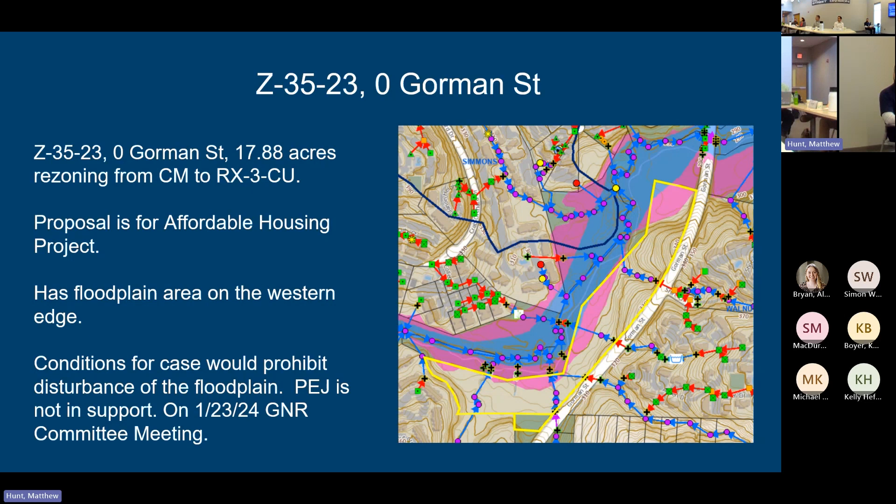All right, next slide. So our next case is like half a mile away down Walnut Creek at Trailwood Drive and a little south of the intersection of Trailwood and David Fairner. Next slide. And it is two properties on Trailwood. One is almost completely in the FEMA floodplain, as you can see. And then the second smaller parcel is highlighted in yellow there. And that's out of the floodplain.

And currently there is a planned development district on this property that was from the mid-2000s, I believe, for essentially putting 12 single family lots on this property. And the applicant owner would like to change that to an R6 zoning. And they would essentially like to mass their density on that non-floodplain area there on the high side, for lack of a better term. There is a condition now to completely preserve 6 acres of the floodplain that's on site, but there's about 7 acres of floodplain there.

They want some wiggle room for like greenway connections and any ground level parking, which is currently allowed under city code as long as you don't change the topography in there. They can use it for parking? You can pave the floodplain? Correct. I mean, you would have to do some more water quality regulations, but as long as you don't change the topography of the floodplain, you can use it for parking. Is the 0.2% the 500 year? Or is that all? Yeah. Okay.

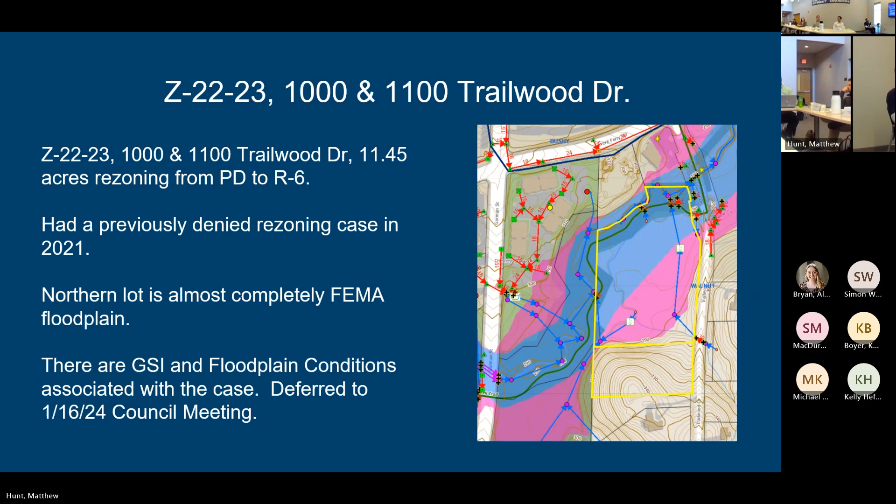next. And the next one is off on the other side of town, in the northwest section of town, on Strickland Road in the Falls Lake watershed, Z4023. Go ahead, next slide. This is a case where they are rezoning 16 acres from R4 to R10. The odd part is that they just rezoned from R1 to R4 back in 2021, and now they're going to come back in to go to R10.

And this would potentially allow for more density and apartments in Falls Lake watershed, which per council policy right now is not allowed, and that's based on a Raleigh Water concern about Falls Lake as well. So they have concerns about this. This is going to the December 12th planning commission meeting. So it's not even to the public hearing process. It's still the planning commission.

And just for everybody's knowledge, the planning commission will talk about it at the 12/12 meeting, which is next Tuesday, and they will either send it to council with the recommendations for public hearing, or they'll hold it till January, because like the city council, the planning commission does not have a second meeting in December this month for the holiday break. So that's kind of where that is, and Raleigh Water and Raleigh Stormwater as well will be attending the planning commission meeting on Tuesday to weigh in on this project.

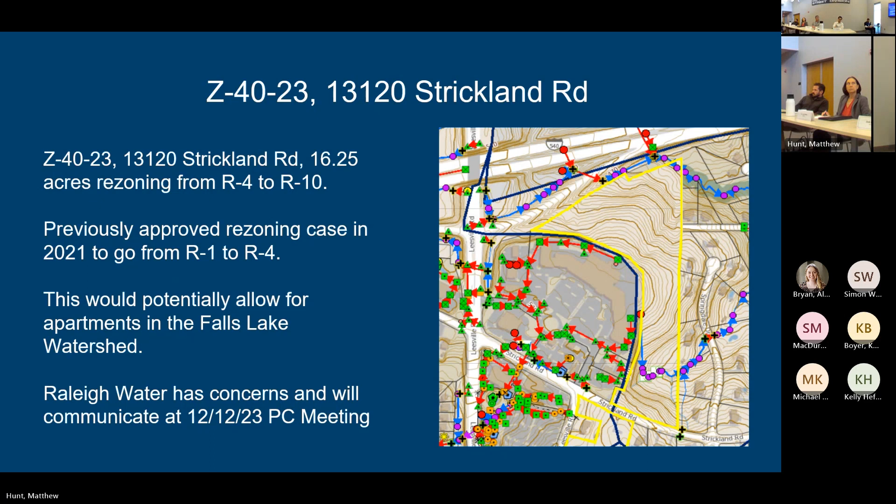All right, that's all I have for that. Stormwater staffing updates: two new employees here.

The first one that I know for sure is here is our new senior water quality specialist, Kim Galusha. Kim comes to us from Raleigh Water and brings a lot of experience in environmental monitoring. She has an associate's degree from NC State and 14 years of work experience, including with the city of Raleigh, ground and greenway system maintenance, land application permit compliance at the Neuse River Resource Recovery Facility, and several years of sampling and technical data management experience for both groundwater and surface water monitoring activities. Kim will be a technical lead within the illicit discharge and water quality monitoring programs, as well as helping us make updates to meet the new permit requirements for the MS4. Welcome, Kim, on board.

And then there's Eric Meyer. Mayor, sorry, I was worried about Kim's last name and didn't even think about it. Sorry.

Eric Meyer has enjoyed a very professional career within the civil engineering space. Prior to joining the city of Raleigh engineering services stormwater division as a CIP project manager, his experience was initially based in the field of geotechnical engineering, primarily in the New York City and Las Vegas markets. Since coming to Raleigh in 2011, his expertise developed with performance and project management of special inspection and construction materials testing activities, consisting of permitting, subsurface investigations, observing foundation installation, inspections and testing of backfilling, reinforced concrete, masonry, mortar, and grout, as well as observation of structural steel, structural wood, and cold form steel framing. In 2023, Eric represented the Structural Engineering Association of North Carolina at the National Council of Structural Engineer Associations annual conference in Anaheim, California. He will be serving as their president in 2024. Eric earned his bachelor's of science degree in civil engineering from Rensselaer Polytechnic Institute.

Thank you. So I'm here this afternoon to give you an update on the city's stormwater design manual. As was noted earlier, we have several folks in attendance today who wish to comment on this. I understand you also received at least 2 emails about this topic, and I will be addressing some of those points in today's presentation.

So this is a brief agenda today. I'm going to talk about the status, give you a big overview of the comments, talk about changes we've made based on those comments, and then go over some of the comments that we've received and acknowledged but have not made changes in response to. Then I'm going to talk about the proposed UDO text changes, which complement the manual, and then we'll talk about schedule.

So at the beginning of September of this year, a draft version 3 was made public on the website, and we solicited comments for a month. We have been working on that draft. We have done a red line version of that, which we will provide you after this meeting, and that was sent out to everyone who commented on version 3. So the red lining just shows the changes that have been made since version 3.

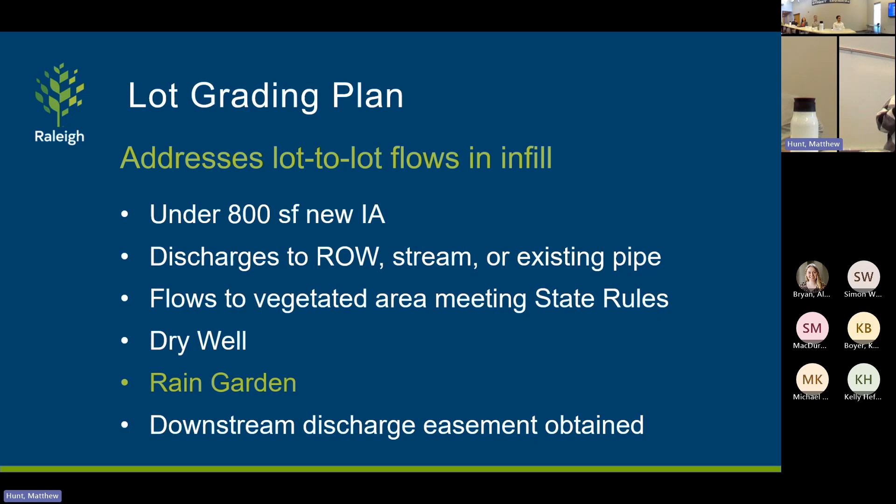All right, I'm moving on to chapter 4, which is the conveyance design chapter.

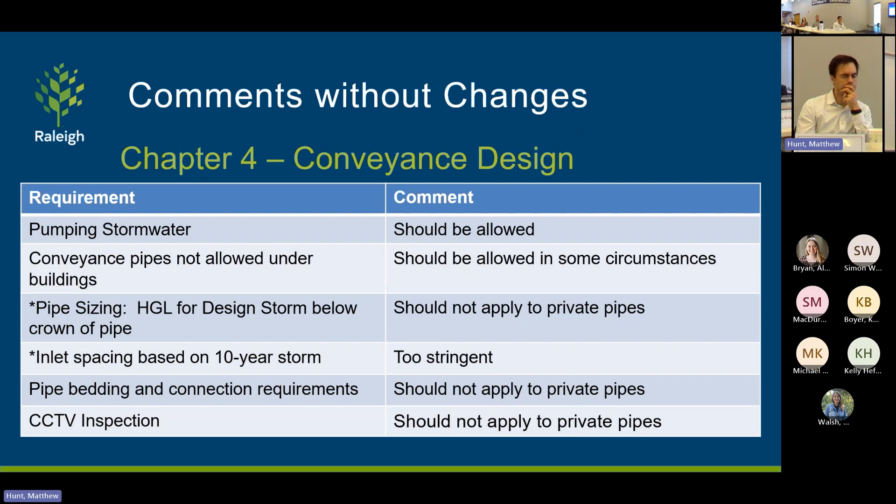Personally, I'm a little worried that if we start publicly sharing documented flooding locations, people will stop coming to us with flooding concerns, and I would hate to see that happen. They don't want us to put that out on our website, but that's kind of where that's going. We do want designers to know that if they contact us, we're happy to share information about where a concern is, based on something like a cross street, in advance of them completing the design.

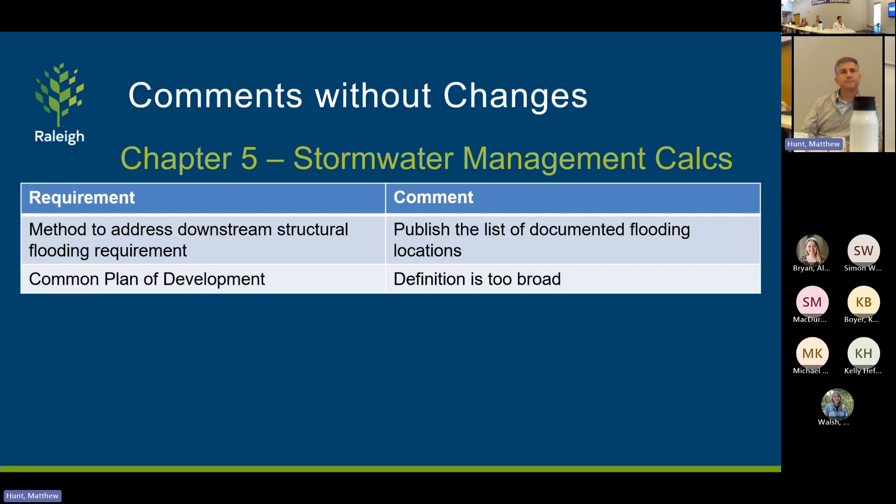Some other comments that we got in the SCM design chapter, we got comments about pumping stormwater. We allow that for rainwater harvesting systems, but not for other SCMs.

We did not previously have very specific requirements about freeboard, the amount of space between the water and the top of an embankment. We have added those specific requirements, and we got some concerns that it would increase size or cost. We are clarifying to folks that we are defining embankment based on the Natural Resources Conservation Service definition, which is 3 feet of water against a fill slope. So this wouldn't affect things like most bioretention or other smaller practices.

We also have included more stringent requirements for SCMs under buildings, which I mentioned before, and for retaining walls used in stormwater control measures. Those are both currently things we allow, and we are going to continue to allow them, but we are asking for a signed and sealed letter from the structural engineer who is designing the retaining wall or the building. The reason we're requiring that is that typically we receive a report signed by the landscape architect or the civil engineer, who is typically not the design professional involved in the retaining wall or building design. We want to make sure they're aware of the saturated conditions that might be caused by those.

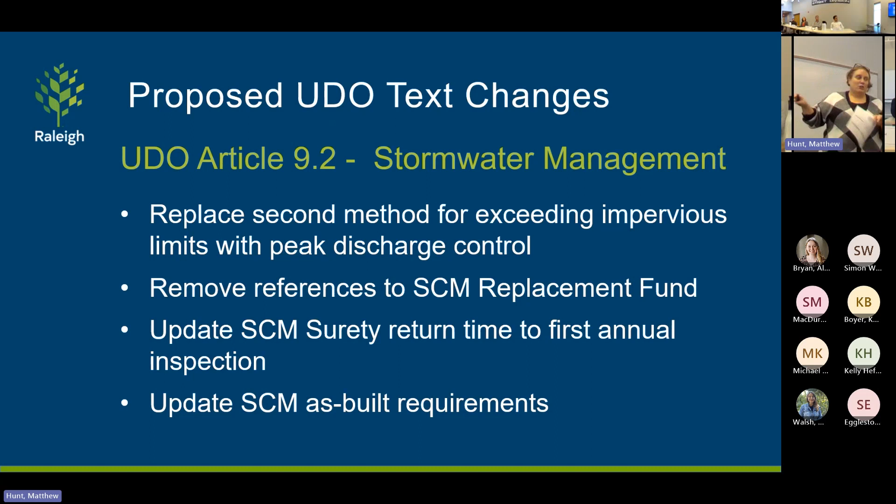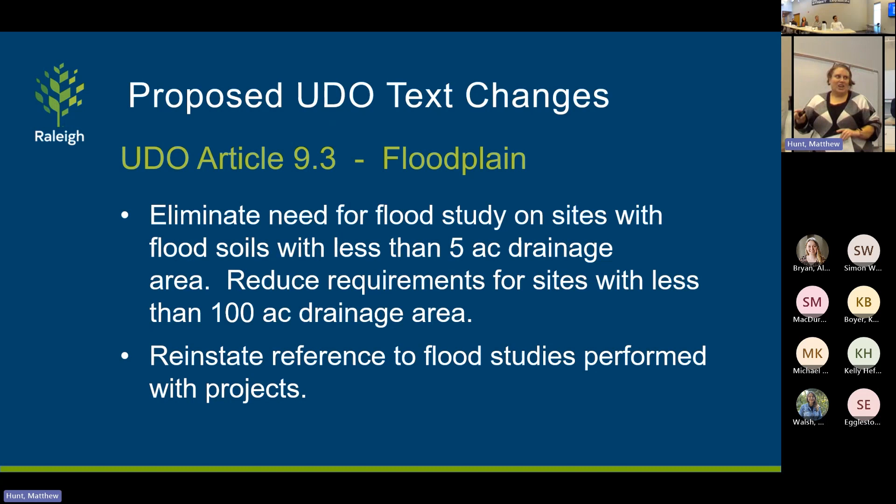We also are making some changes to the SCM as-built requirements. Those are in the design manual that went out for review, and we'll just be making the UDO match that. These two items are also in the design manual, and we're making the UDO match that. We'll also be updating the ESC surety amount.

If you have questions about that, I'm going to ask Lauren to help.

The design manual will replace both the current design manual and GILDA, the guidelines for land disturbing activity. There are some requirements currently in GILDA that we're going to move to the UDO.

This is probably one of the more substantive UDO, direct-to-UDO text changes. It's the difference between built area and built upon area, which is very confusing to the public, to designers, and sometimes to the reviewers.

Right now, both terms are used in the UDO, and they mean different things. Built upon area is used in most of the regulations that apply throughout the city. Built area is only used in the watershed overlays. Built upon area basically means impervious area, while built area means impervious area plus permeable pavement and green roofs, and other things that could be partially impervious.

My understanding is that the history of this is that it was intended to further limit the amount of development that could occur in the watershed overlays. We do see folks wanting to use permeable pavement, particularly in the watershed overlay districts.

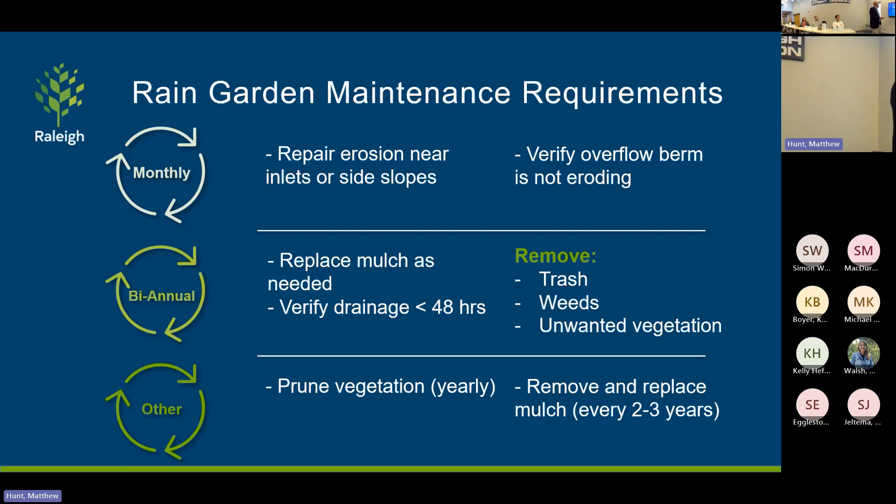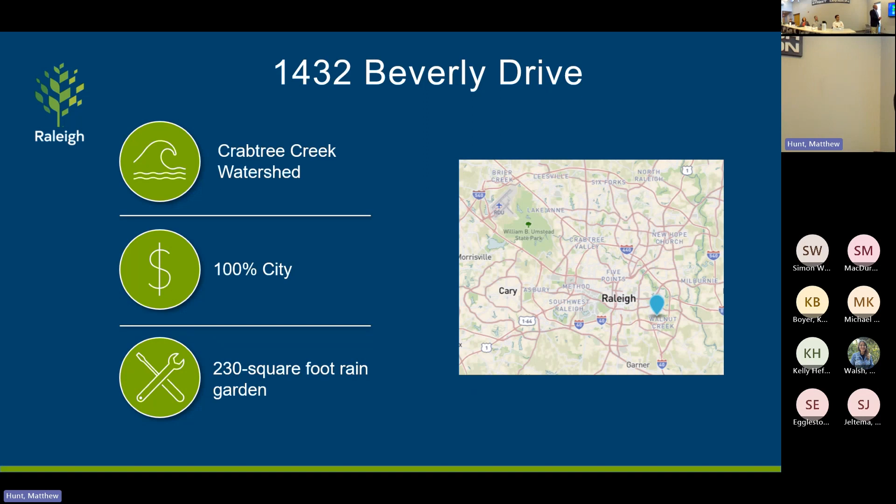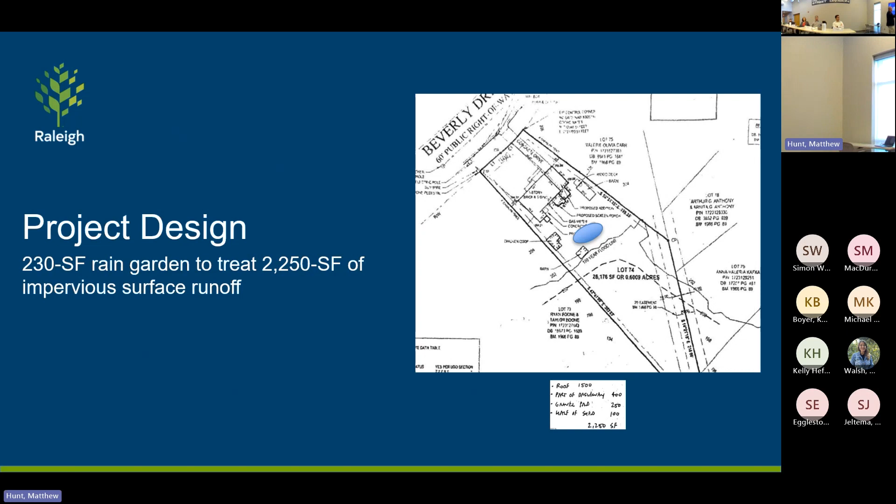So we'll jump right into the first project. This is Beverly Drive, Crabtree Creek Watershed. This is a 100% eligible property, pretty standard 230 square foot rain garden, capturing all the runoff off of their house and part of the driveway, located in the backyard, outside of the 100-year floodplain and outside of a sanitary sewer easement that's in the back. You can see that they've recently done work on that sanitary sewer easement. The rain garden is not going to be in that area. You can see some of the drainage area up in this home.

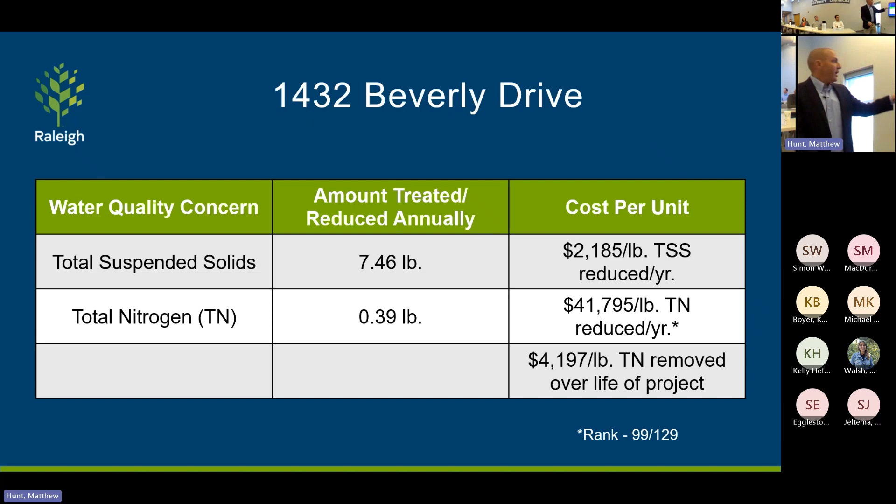Total cost, $16,000. Cost breakdown. I'm going to run through these; if you need me to slow down, please let me know, and I can go back and elaborate. You can see how this ranks against all previously approved rain gardens. You can see the metric once again. The limit set by the commission in February of '21 was $7,000 per pound of nitrogen, as a point of reference as we move through these. So I want to ask, as I typically ask, would you like to review and vote on these separately or collectively? Let's just vote on each one.

Any questions? Just curious, it's 100%. Is this our first 100%? Second; the commission saw the first today. Curious. You're talking about communication or something. And I have more on that. Okay. Grant, if no questions, motion to approve.

Second. Barrett, all in favor? No opposition. Okay, let's go. Great. We'll move on to our second 100% project. This is 2421 Bertie Drive.

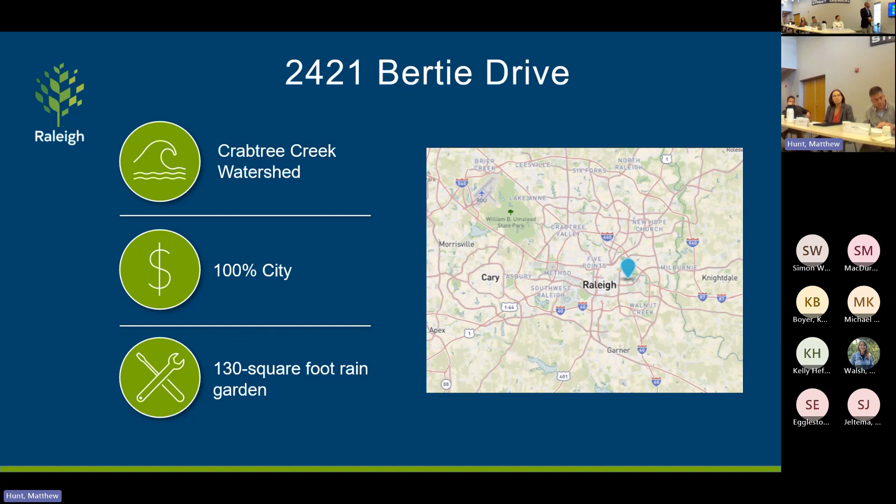So the rain garden, about half the size, going to treat roof runoff and a little bit of driveway. It's going to be in the front yard in this case. You'll notice that there is a private pipe that runs from the backyard and goes out to the street. There is no private or public easement here. The final product will lie on either side of that. They're not sure where it'll land, but it'll be outside of the footprint of that private pipe.

And the pictures might tell a better story. They have a lot of room in this front yard area. The pipe is closer to that white fence, so most likely it'll be located out of that footprint. There's no other utilities that would impede that. Price lower than the last project, fairly typical. It does require an under drain and they do have enough drop for that to function properly. You'll notice, once again, the rank and it being under the nitrogen metric.

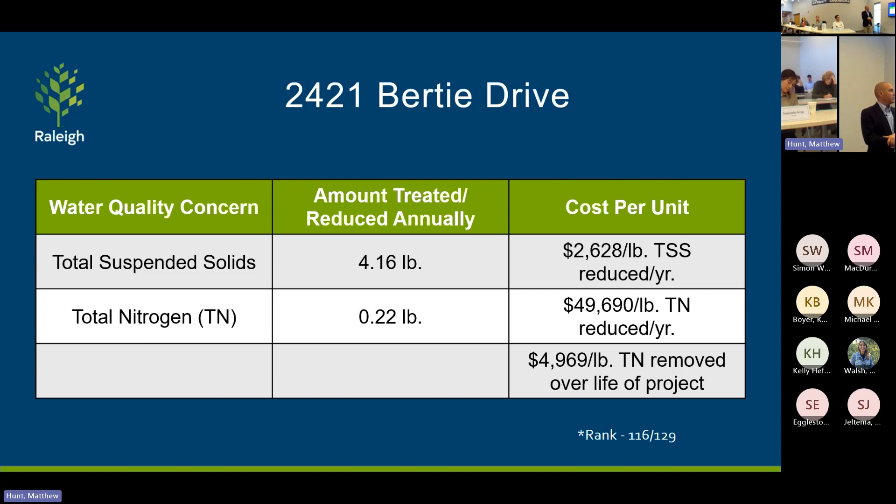Any questions for Bertie Drive? Yes, sir. You just talk about what's smaller, even though they're small. Sure, it goes back to how much impervious surface they're treating. So quick rule of thumb, we tell folks, and this is assuming 10 inches of ponding in their rain garden, we tell folks to account for 10% of the footprint that's flowing to it. So if they have 1,000 square feet coming to it, they're gonna have a 100 square foot rain garden, assuming that 10 inches of ponding on the surface.

That is a conservative estimate where if you were to pick up that 1 inch of rain off the roof and put it in that rain garden, it would be able to handle that volume. Obviously, that's conservative, so these overperform, and that is only mutually beneficial for the property owner and the city. There wouldn't be much benefit later. Not from a water quality standpoint. Kind of the rule of thumb is that most of the pollutants are in that first 1 inch of rain, so capturing 2 inches of rain from a pollutant removal standpoint is not cost effective.

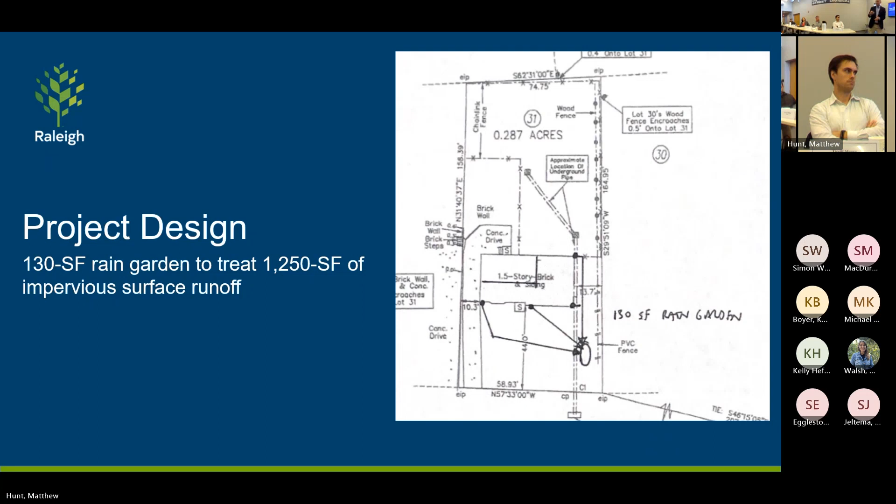Any other question? Motion to approve. Luann, second. All in favor? All right, thank you. On to number 3, Glenridge Drive. This was actually submitted back in the summer, and we have been bringing as many as feasible to the commission for review. So this one has been in the queue for a little while.

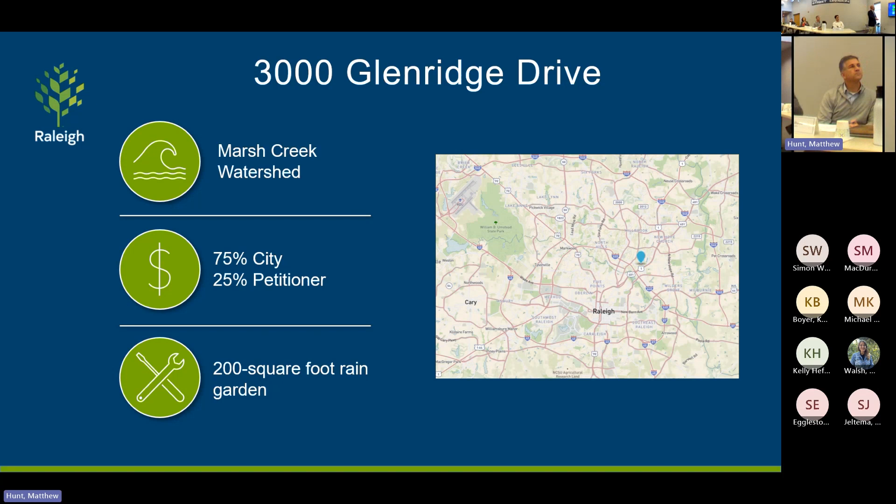Similar to the ones we just reviewed, eligible for 75% reimbursement. That factor of 10 rule of thumb, and I might add that has been well received by both designers and applicants. It's easy for them to wrap their head around. I'm thankful that it's not like pi or something, explaining that concept. But yeah, so it captures roof runoff, a little bit of driveway.

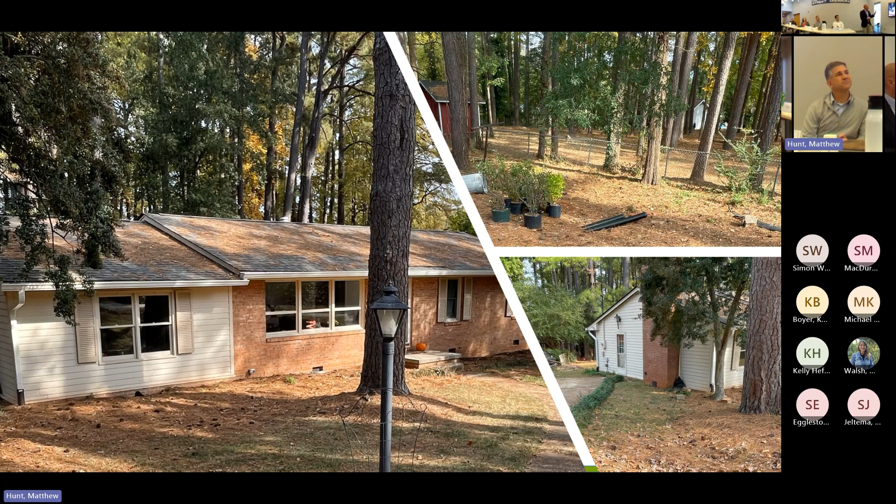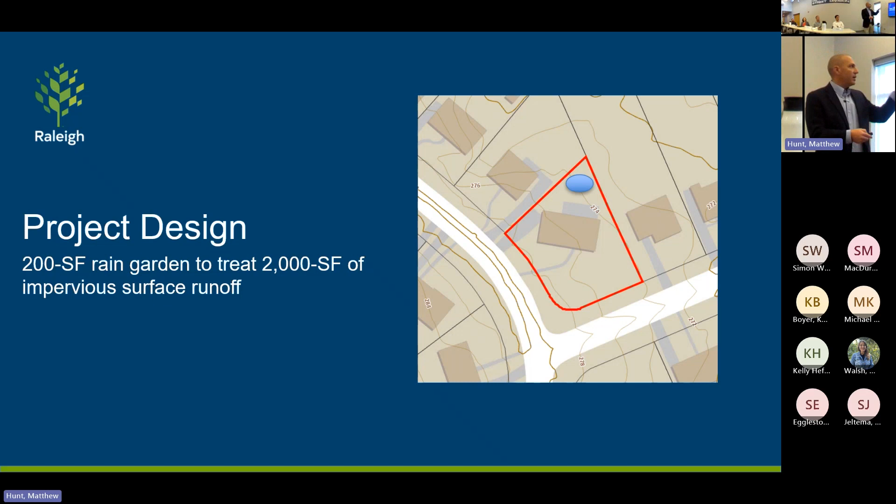One thing that's special about this project is the runoff as it stands just pours into the neighbor's yard. So this will alleviate some nuisance flooding on a downstream neighbor, and also add an aesthetic function and amenity in this backyard. Price splits the difference right there between the first two we looked at, so not too far out of line. And you'll see the metrics also floating around the 4,000 pound of nitrogen over life of the project. Any questions with 3000 Glenridge Drive?

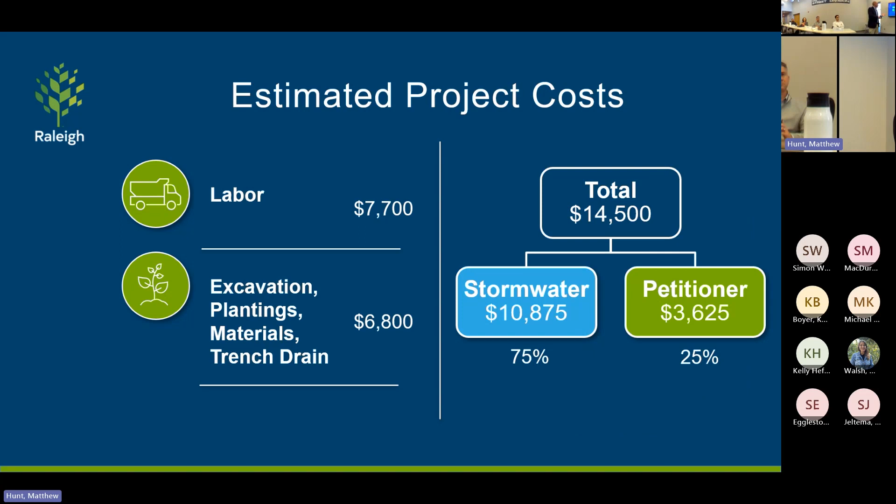But they can oversize as long as it's still cost effective. They could put in a larger one that is cost effective. What you run into is that cost metric. If it's going to cost twice this cost to install a rain garden twice that size, your metric is going to be potentially twice this metric, and you're not going to get much.

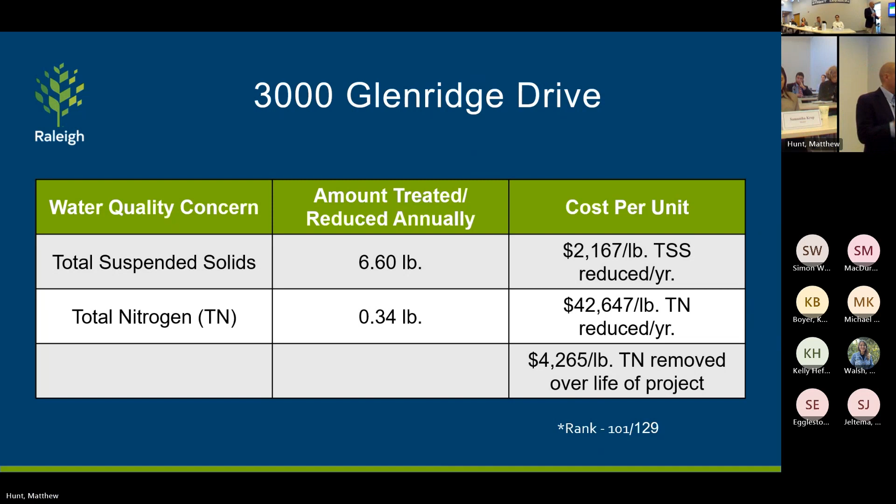It's probably going to be higher because you're not going to get as much credit for removal. So that metric is great to be able to lean on if needed. And we aren't going to push back if they come back and say 300 square foot rain garden. That's fine. We're going to look at the metric and then present that to y'all. So it's not that it's not allowed. There's just considerations if you're going to go bigger, more expensive, and maybe that answered your question or comment.

Motion to approve. Yeah. All in favor? Good. All right, next project. Prescott Place. Another one of these that probably could have come in July, but we just had so many projects in a day. So one of the last of the summer rain gardens.

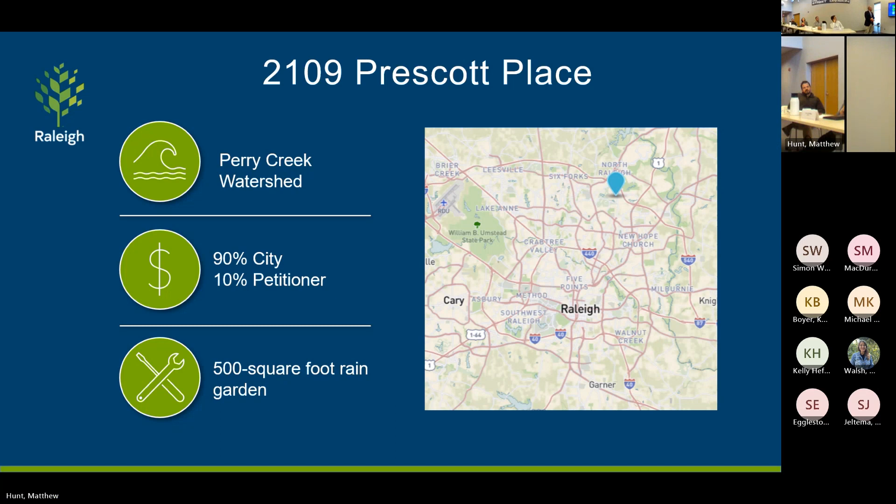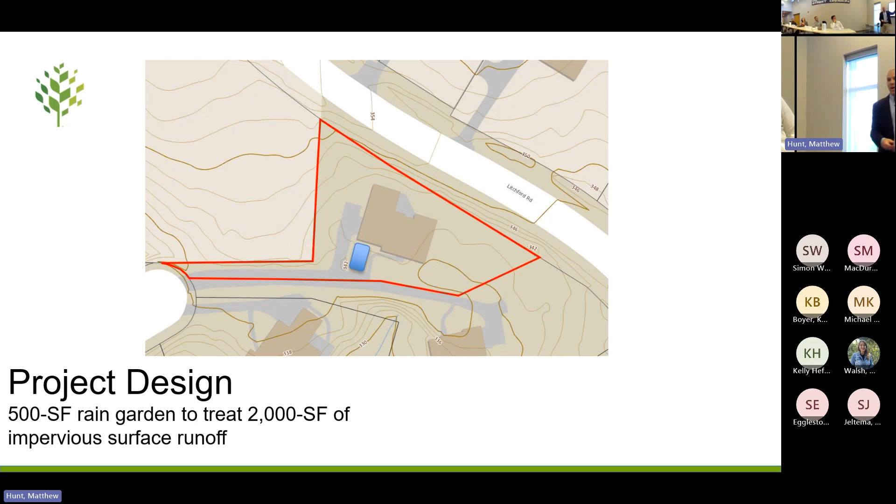Yeah, this is an example, very large rain garden, 500 square feet. Notice their treatment area, 2,000 square feet. So this was the example in my mind. Looking at this, it's kind of a unique configuration. They have a relatively flat area in the front of their yard between a driveway, a walking area, and an alley. They own the impervious surface that drains to it, and it's just unused space.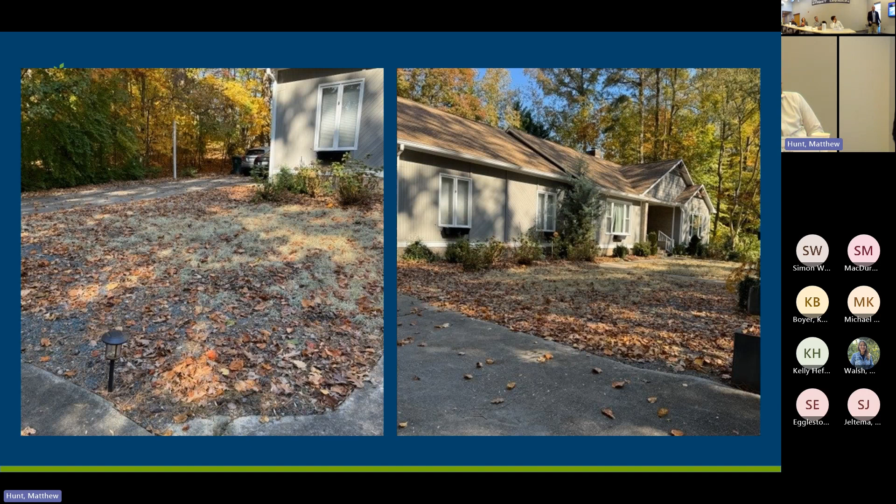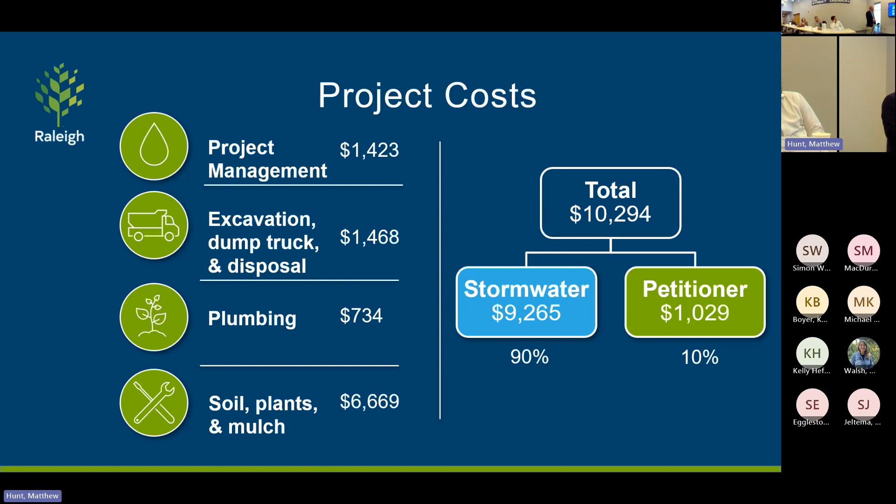It's got good infiltration, so they're gonna direct some downspouts to it. They're gonna capture the surrounding impervious. And this is gonna serve both a water quality benefit and an aesthetic amenity in that space at the front of the property. So you notice pretty good price for the size. Good breakdown there, and you'll notice the metric reflects that price point in the amount of impervious being treated.

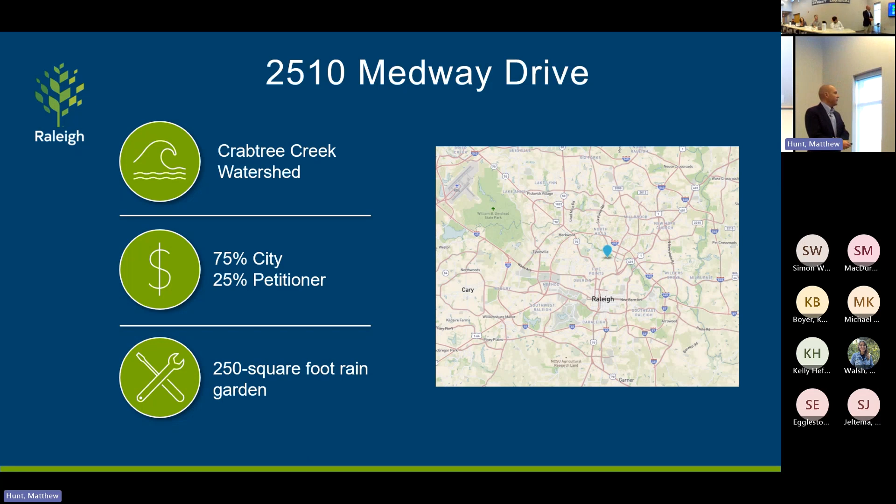So I know I'm racing through these, but in the interest of time, any questions for Prescott Place? Motion to approve. Carol, Wayne, second, all in favor? All right, and final one today is Medway Drive. Crabtree Watershed, 250 square feet. Everything's pointing to the back left corner of the house, capturing roof runoff. You'll see the area back here in the backyard. That's for the future footprint.

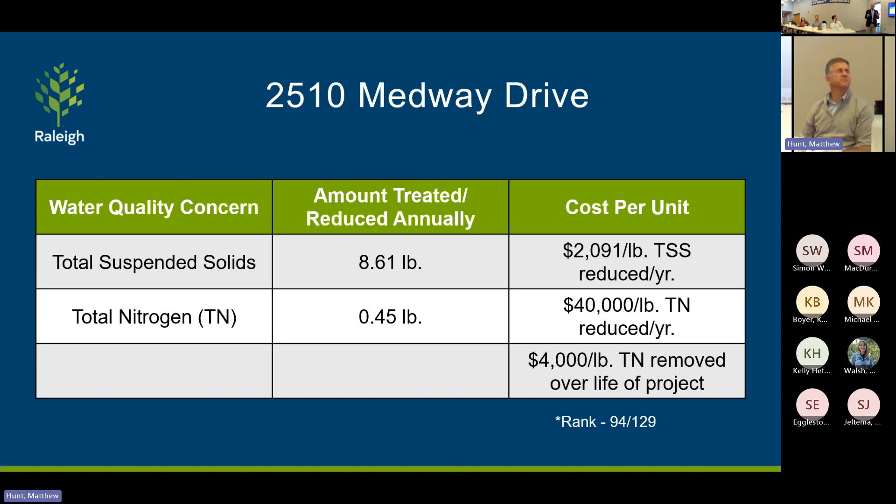About as straightforward as they come. You have slope that goes there anyways. Water can easily be directed to the rain garden. Breakdown in cost. And then your metric, you'll see how that compares to the other four. Nothing really remarkable to point out across these five that I wanted to show y'all. Any questions on Medway? Is there a simple way to explain why this one only qualifies for 75% in the Crabtree Creek watershed as opposed to the others that are 90%?

Absolutely. Policy does that. So the policy identifies five high priority areas. And those are eligible for 90%. The rest of the city is 75%. So those five high priority areas are your two TMDL watersheds, which have been identified by the state as being impaired watersheds. So there's two. We have two water supply watersheds, Falls Lake and Swift Creek. And so those future drinking water sources, they're priority.

So that's four. And then when this concept was developed, they looked at a planning overlay that captured the downtown district that was almost 100% impervious, where everything's built out. We're not gonna be able to treat runoff with UDO or through redevelopment because it's 100% impervious. We wanted to target that. So downtown, the two watershed overlays and the two TMDLs. So that's the 90% compared to the 75.

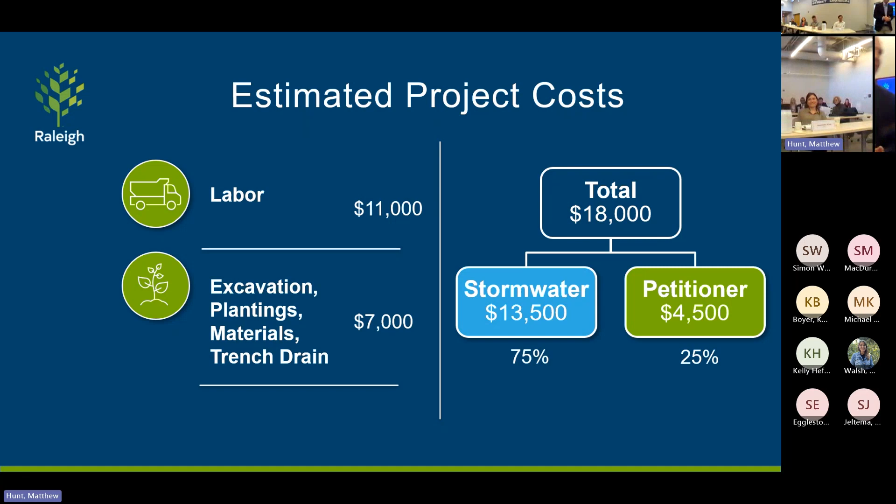And then the 100%. 100% is based on several criteria, census data, and I'm more than happy to elaborate on that. If located geographically within those areas, there's an income threshold, a rent threshold, and/or a nonprofit entity can apply for the 100%. I remember having this conversation. I know it's redundant, but I appreciate the clarification. Anytime you got questions, we can go into a lot more detail if needed. Thanks. Happy to answer. Anything else?

Motion to approve. John, second. Matt, all in favor? Very good. Thank you so much. Thank you all for your support. It looks like we're at 66,000 till end of June. Yes, sir, Fred. And we've approved how many in the standard? We are at 17 projects for the year. Y'all just approved these, so we're up to 22 projects.

Two of them are 100%. One is from the previous fiscal year, if I'm not mistaken. So I have to look back. 2 or 3 are the 100%. That feels pretty rapid. Is that ahead of schedule? Absolutely. Ahead of schedule both in project number and in expenditure of our dedicated fund. Make sure Justin highlighted that. That's a lot. So thank you all.

Justin's hair's on fire. That's our big burn off. All right, thank you, Justin.

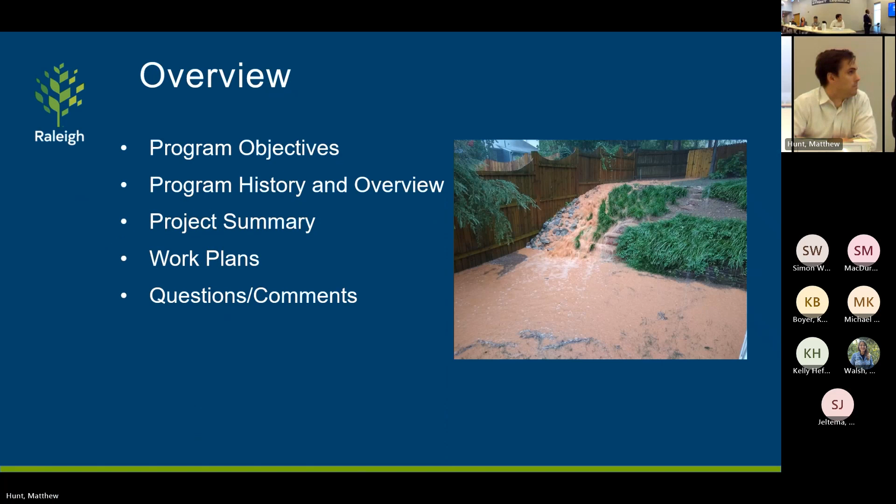So here's the overview of the presentation. I have to read this—it's the ritual we do every time.

The mission of the Stormwater Division is to preserve and protect life, support healthy natural resources, and complement sustainable growth within the Raleigh community. The objective of the DA program is to assist in reducing flood hazards from urban stormwater runoff, and to help protect and improve water quality in local streams and other surface waters.

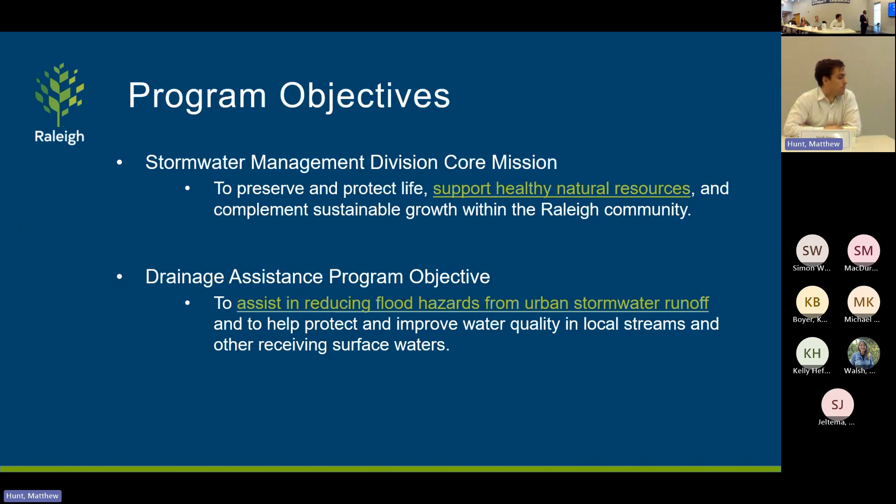The city has been growing rapidly over the last 20 years. A lot of growth, and our infrastructure has been getting older—the pipes, the streams, their courses have changed, erosion has increased, and the need for resources has increased.

So when we eliminated the cost share program and made it fully 100% city funded, that was the need of the hour—to address equity issues across the city and to efficiently deliver the product. That's the quick overview of the project so far.

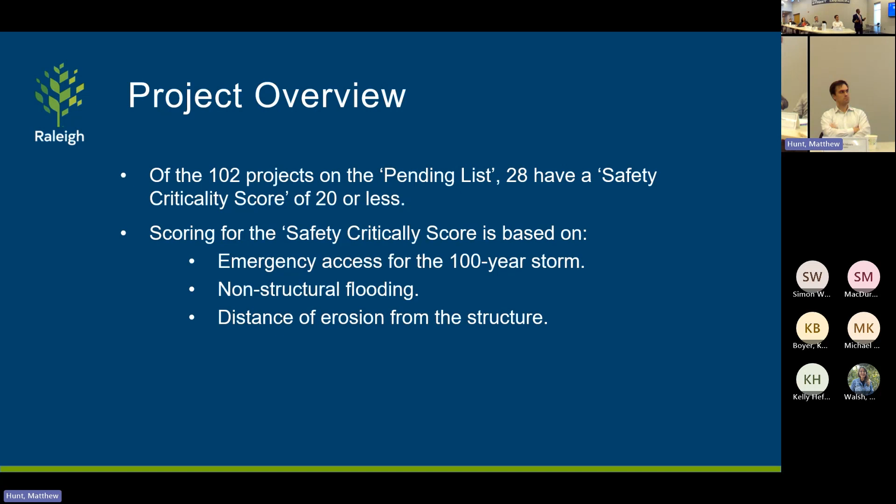So again, it's a multi-pronged approach that we are trying to adopt to expedite the delivery and do more number of projects - all the pending list and the projects coming up each year. Staffing has been an issue, and we are trying to be mindful to have the right balance, the optimum number of staff - not to hire too many or too few, but the right balance. It's hard to say what's the right balance because the projects fluctuate, but I think we need some more staff, and that's what we are trying to hire.

So Chad has been working very hard, like since last 6 months. We were not very successful in getting a senior engineer on board, but this time we tried even harder to attract more applicants from across the country. So the selecting interview is end of this month, right before Christmas - say 2 weeks. We're very hopeful that we got a good pool of candidates.

So we should be able to recruit an engineer who can do in-house design, and then we can have the construction project. We already recruited - you met Eric, right? So Eric is here, and then one more engineer we are trying to recruit. So we will have 3 new staff. That will definitely increase our capacity to take on more projects.

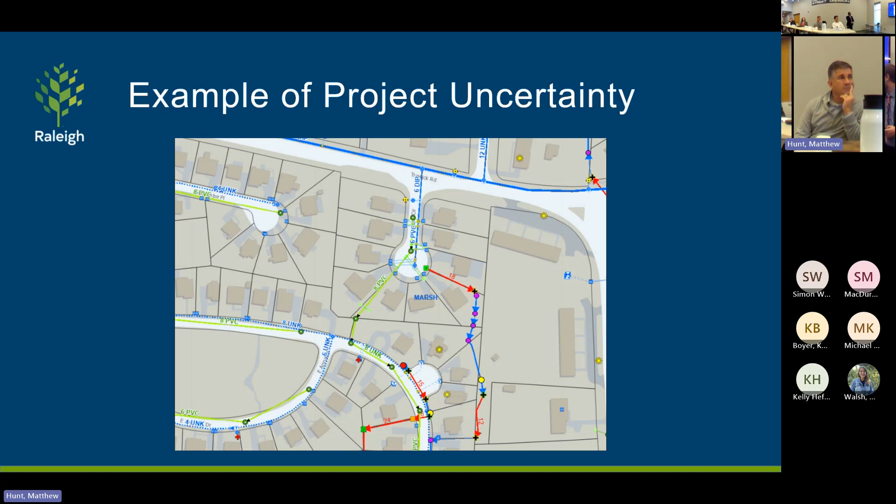So we had to go back to the drawing board, and we met with the residents again, even after several community meetings with these residents in this neighborhood as well, to see how they were impacted.

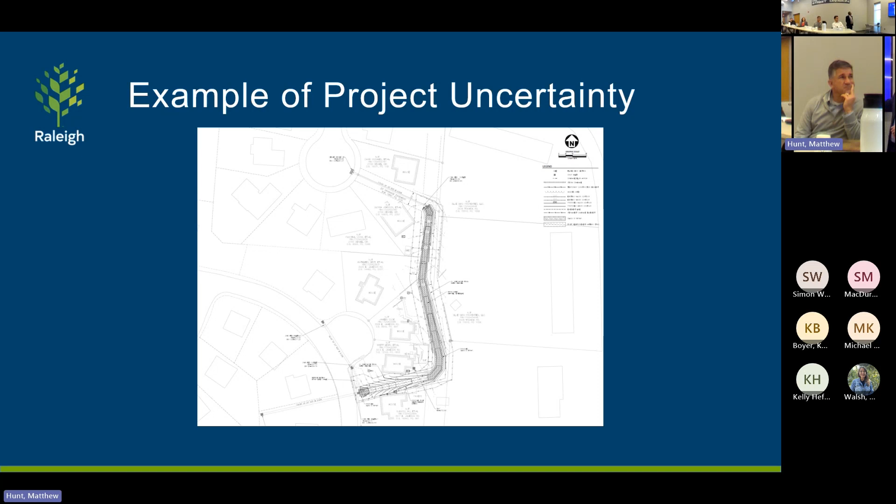Here's a design plan that shows the initial design going around to the property that was a non-benefiter, and then we have the design to try and keep it on properties that are impacted. Why this solution wasn't thought of first was because of the impacts we see with the trees on the neighborhood and the driveway, which they were concerned about. But we did make a good faith effort to try and get that non-benefiter to participate. At the end of the day, if they're not willing to participate, we have to move on and find another solution.

But these are some examples of delays that can occur that, in my opinion, are beyond our control.

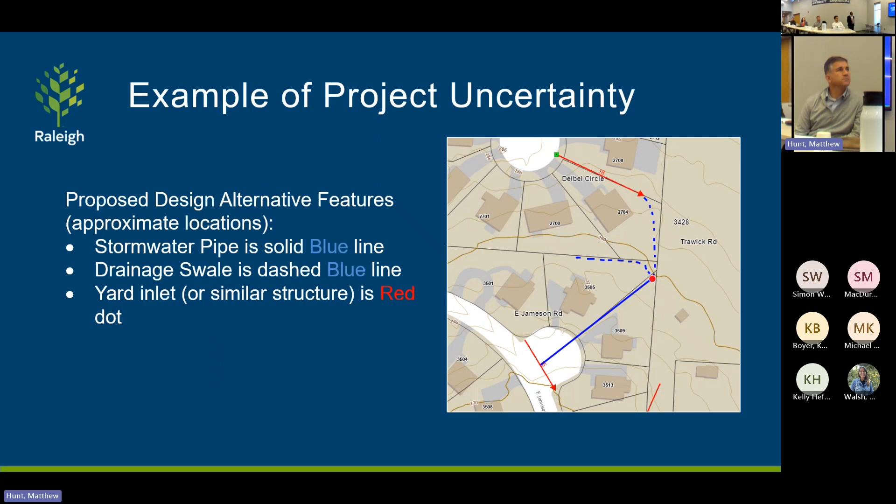We work with our partners. We are working with Raleigh Water and Parks, Resources, Culture, and Recreation to try and work on some projects. I'll get into that as well here.

Also, Transportation Field Services, they do a great job. I'm not sure if you remember on our last SMAC go around where we had Foxtrot Drive - very, very minimal cost because they are going to do the project and we're going to pay for the surveying. They're working on 3 projects right now: Columbia, Holden Street, and Foxtrot. Estimated cost savings, including their time and resources, on those 3 projects will be about $90,000.

So again, we are very appreciative of the work that they do and how they help us, and we are looking at 2 more projects with Transportation Field Services coming up in the next year.

In-house capabilities: with the creation of the stream stabilization program, we were able to expand what we could do, because remember, under drainage assistance, we could only repair streams that were really immediate or close to the structure, threatening the structure. With the stream stabilization program, now we have stream repair workshops, buffer builder bags, and plantings on smaller jobs.

I'll go through some examples here in the next few slides, but I do want to point out that Dominic Smalls, who is the program manager for the stream stabilization program, has done a wonderful job. If you ever go to a public meeting and meet Dominic, you'll see him give out these buffer builder bags, which I love that name. It's a hit, and he's doing a great job with that program.

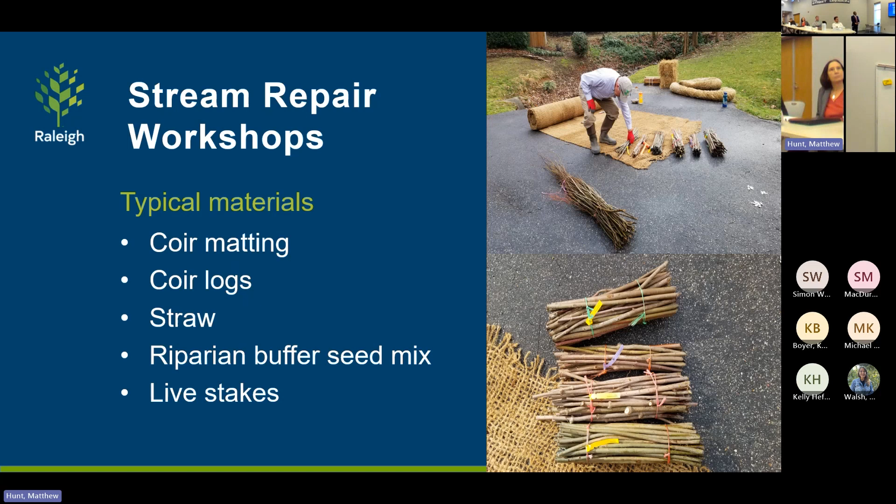So, stream repair workshop jobs - this is great. We partner with NC State Bio-Ag, and we do coir matting, coir logs, straw, riparian buffer seed mix, and live stakes. These are projects that we wouldn't be able to cover under drainage assistance. We're going out there on these smaller jobs and helping the homeowners out.

This is the before and after, and this is the class that we had earlier this year. We see a lot of people coming to this class. Our goal is to teach residents and park staff, because what we want to do is empower the residents - there's only so much that we can do. We have limited capabilities, limited staff, and as you can probably figure out, there are a lot of streams, creeks, and rivers on Parks property. I love this photo here on the right, because it really shows that vegetation growing, and that's what you want to see.

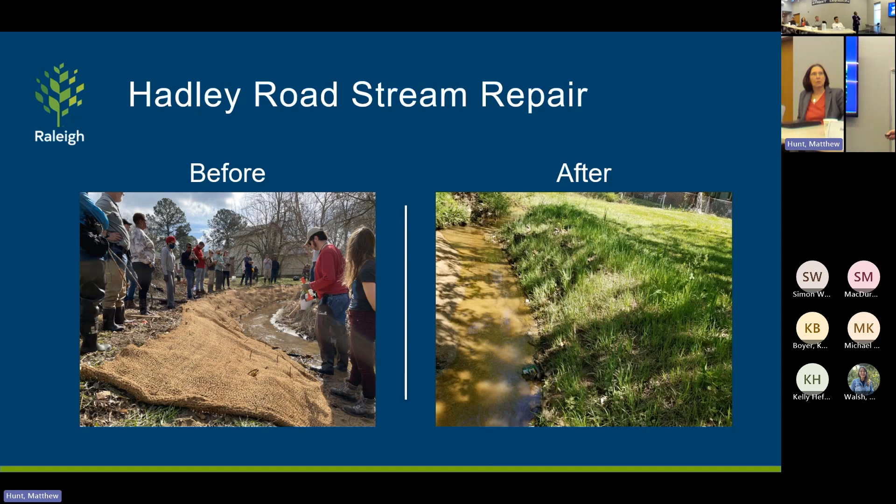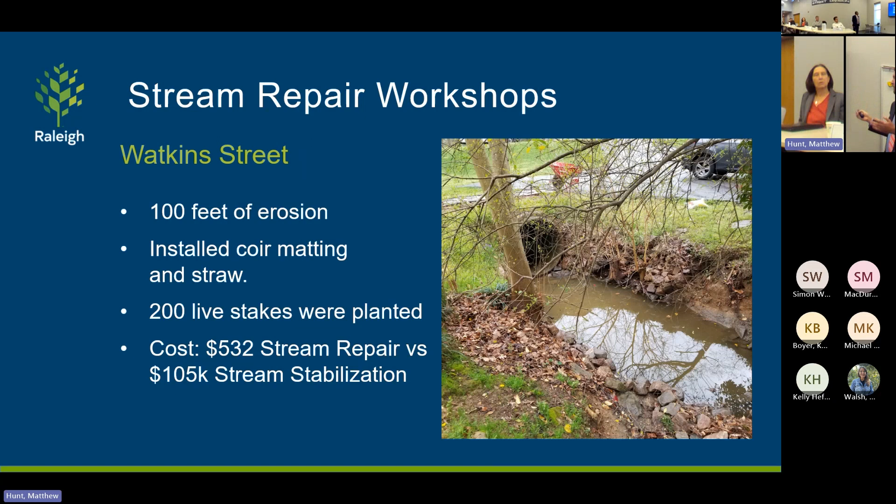We have Watkins Street, 100 feet of erosion. What I really like here is the cost savings. Because of the height and the length, we can go in and do one of these stream repair workshops. We don't have to go through the design phase, the permitting, the bidding and construction, which can really drive up costs. Now, that's not to say we could do something like this on every job - we are limited in terms of NC State Bio-Agricultural availability, the scope, the height, and how long the stream is, but we try and do these repair jobs where we can.

And the buffer builder bag - this is first come, first served. We go out to the public meetings, and this is one way we can help people, because they say, hey, I've got a problem, but it's really not severe - I have a ditch, I have a little stream, is there something you can help me with? Two years ago, we would say, well, we can put you on the list with 100 people and you may be 80th. But at least now we give them something to go home with, and smiling faces.

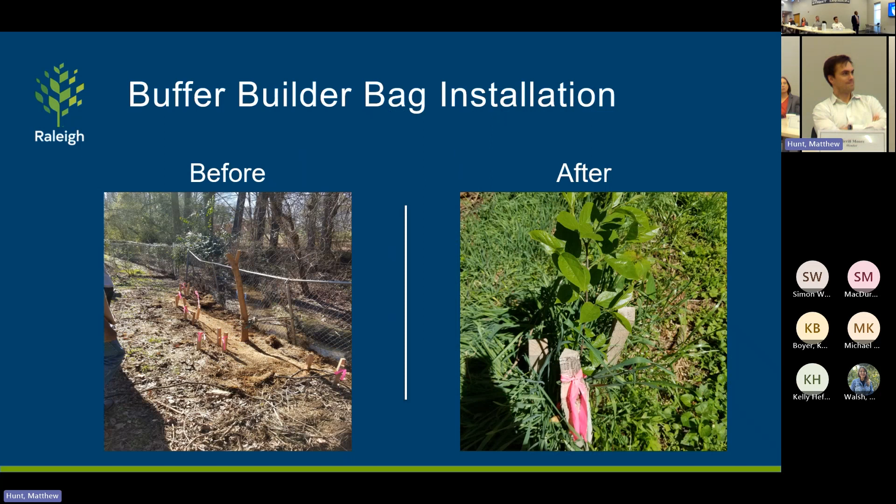Here's before and after showing the buffer builder bag installation.

So what we would like to do as we're addressing this backlog is have all projects that are currently approved completed within 4 years. David Kiker's group is doing a great job getting his project managers up to date and getting the projects out the door.

To deliver projects equal or greater than each year's funding allowance. In other words, if we're allotted, for example, $1.5 million, we would like to spend at least $1.5 million between design and construction, so at least we're not losing ground. We're keeping ground or making ground.

And then once projects are approved by SMAC and council, have them completed within 3 years. I thank you for your time.

We'll welcome questions. So you've approved 70, you've completed 24, that's 46 remaining. You say you're gonna do 46 in 4 years?

We would like to, yes, because we would have... well, now it's not exactly 46 because some of those have been withdrawn. But yes, within four years, we would like—it's probably about 40 because we've had a number withdrawn, for example, East Lane Street, which started off as DA, that was in that 70, but went to CIP.